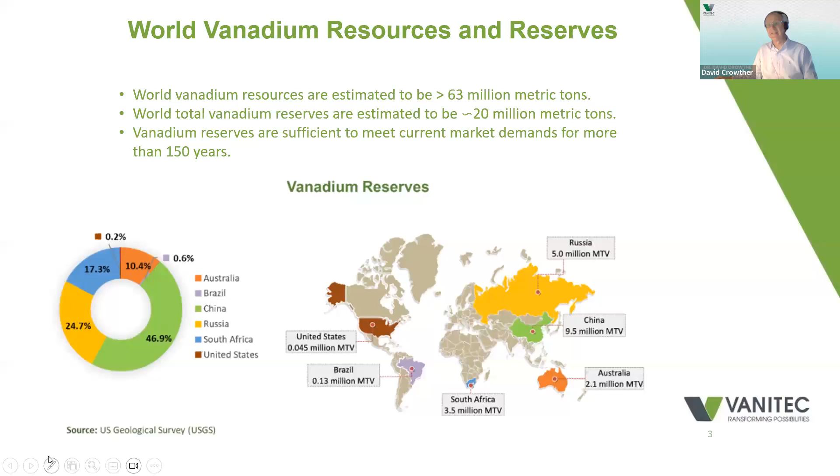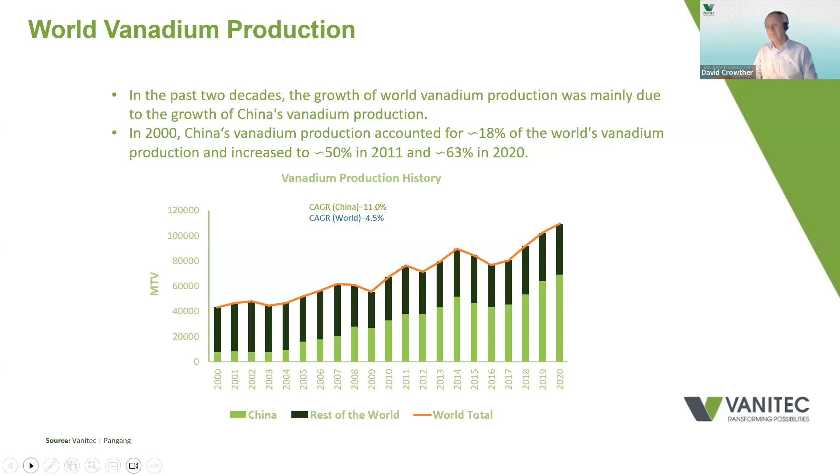Looking at the use of vanadium in steel, the majority is used in HSLA steels, high strength, low alloy steels, and we're talking about vanadium additions of perhaps 0.1% or less or slightly more. Another proportion of vanadium goes into more highly alloyed steels, such as tool steels. And in these steels, we're talking about vanadium additions of perhaps 1 or 2%.

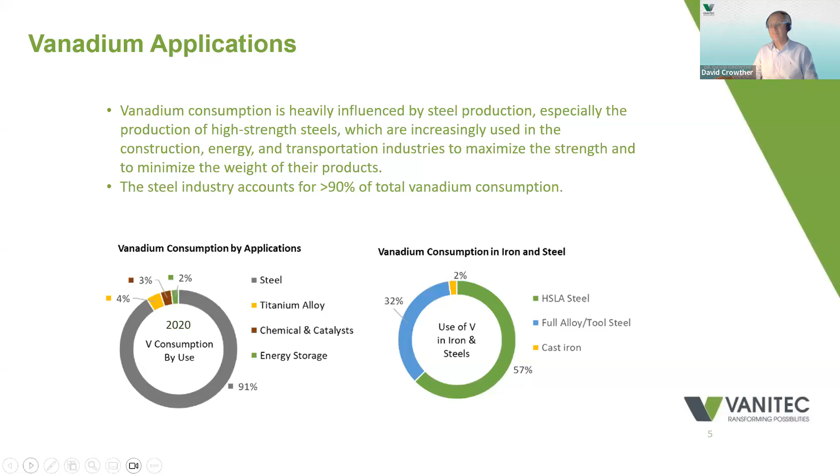Moving on to vanadium steel metallurgy now, and again, it's a huge topic, and we'll pick up on the details later on in the talk. But just as an introduction, I'd like to highlight some of the roles that vanadium plays in steel metallurgy.

Vanadium can be present in solid solution, in which case it increases the hardenability of the steel, but it's often present as precipitates of vanadium carbides, vanadium nitrides, vanadium carbonitrides, and it's these precipitates which have a big influence on properties. They can be present in very large precipitates, for example, in tool steels, where they give wear resistance.

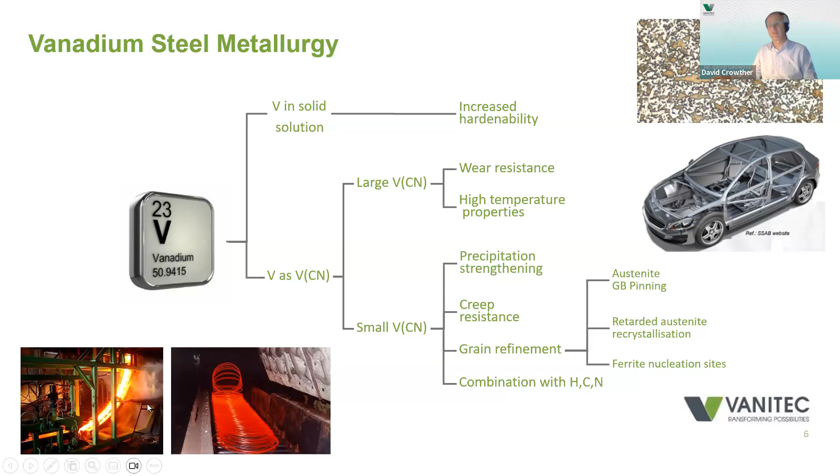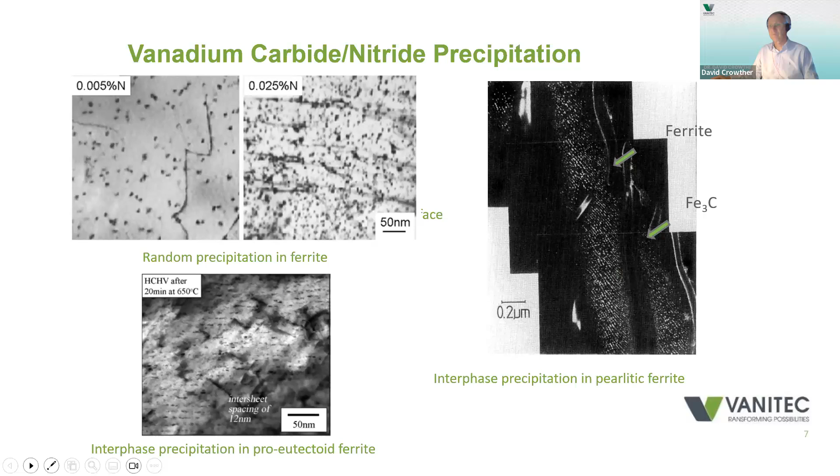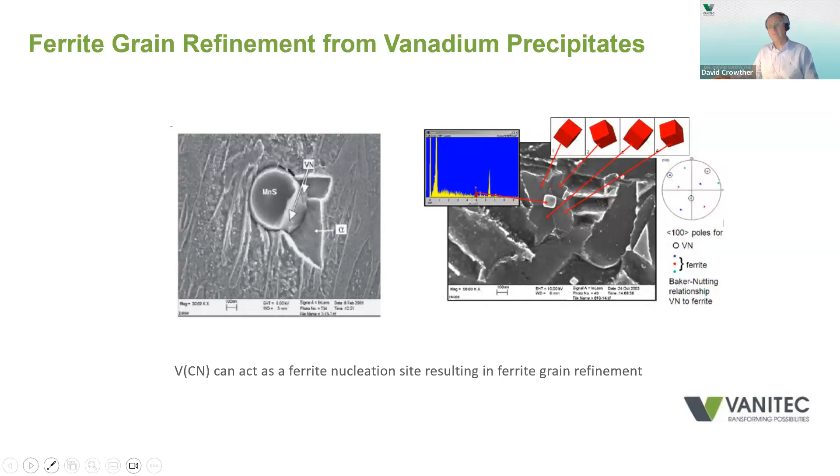Looking at some applications now, steel is used in the construction industry very widely, and that accounts for perhaps 50% of world steel production. And vanadium is used in a lot of these steel products. For example, in high-strength reinforcing bar, vanadium is very commonly used, particularly in China, where most of the rebar is vanadium containing, and also in the US. Vanadium is also used in high-strength sections, and also in high-strength rods, which are drawn into wire to form suspension cables on bridges.

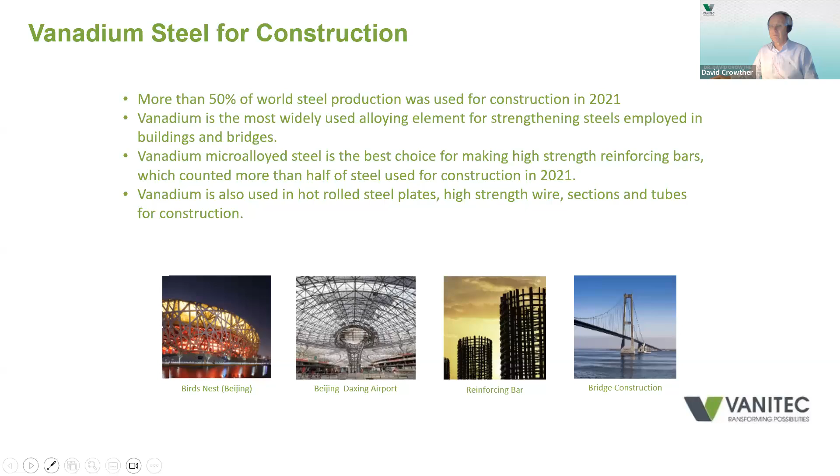Looking at the transportation sector, again, a major steel using sector, vanadium microalloyed steel plates are often used in the shipbuilding industry. Vanadium is also used quite commonly in rails, and I think this has some relevance to the Indian situation, where, as I'm sure you know, there's a big expansion of the high-speed rail network, and vanadium containing rails are being used in this expansion because vanadium rails have increased wear resistance.

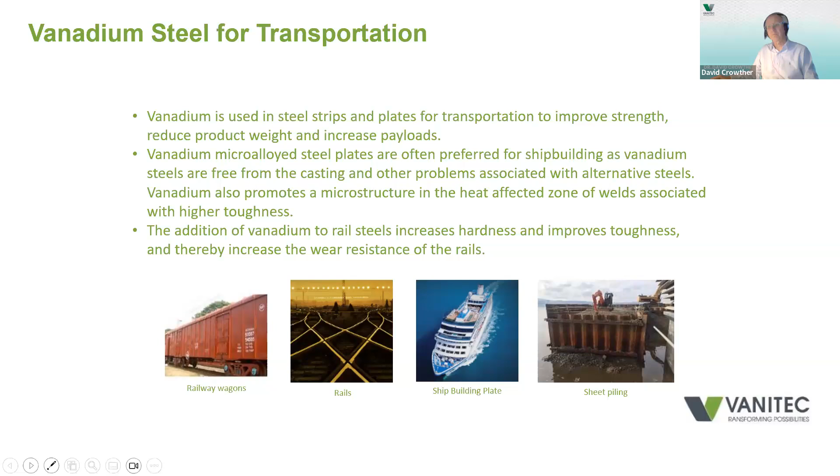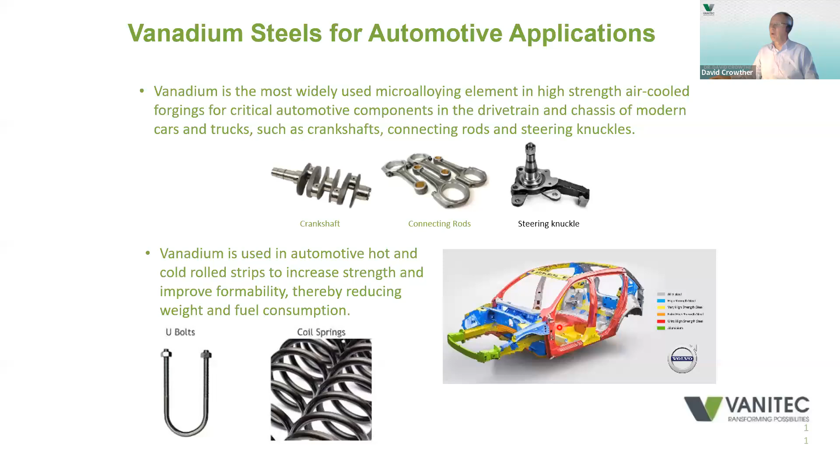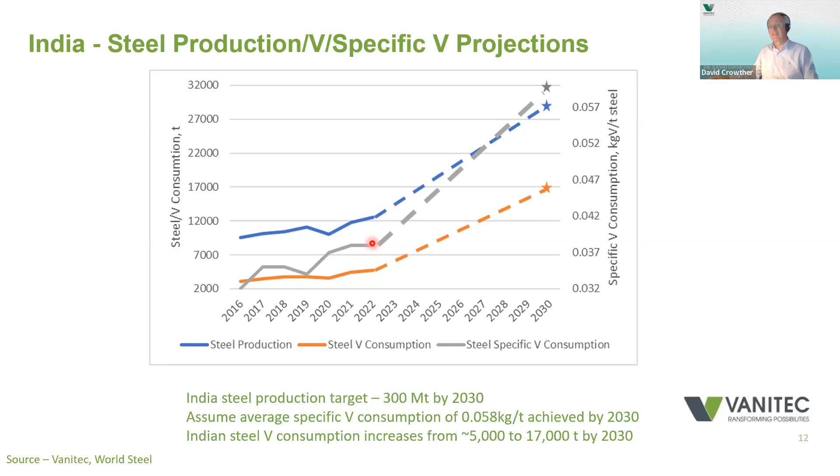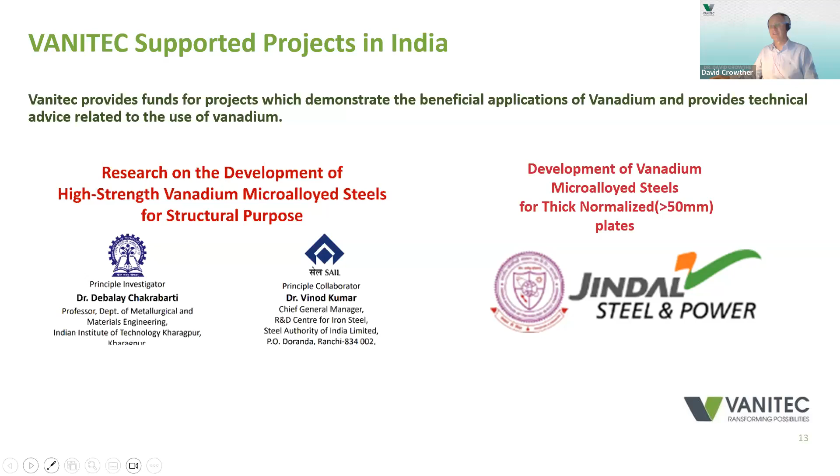So if anyone has any suggestions for new research projects on vanadium-containing steels, please get in touch, and we'd be very interested in taking a look at any new ideas. We're also keen to promote the use of vanadium microalloyed steels, which is the purpose of this seminar. And we've also held other seminars, particularly one last year, again with the help of some of our research associates. We held a great seminar on microalloyed steels, which again aims to promote the use of these steels.

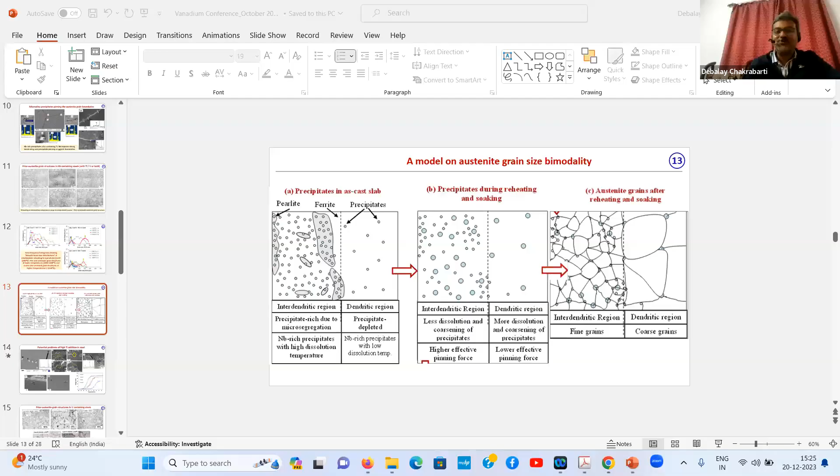Thank you, Manish, for the introduction. Let me share my screen quickly because I want to show you some slides. What we are doing is a project funded by Vanitec Limited. Dr. Dave and his team from Vanitec funded this work, and we are doing it in collaboration with the Steel Authority of India Limited. The project is running at Kharagpur, and SAIL is our industrial partner.

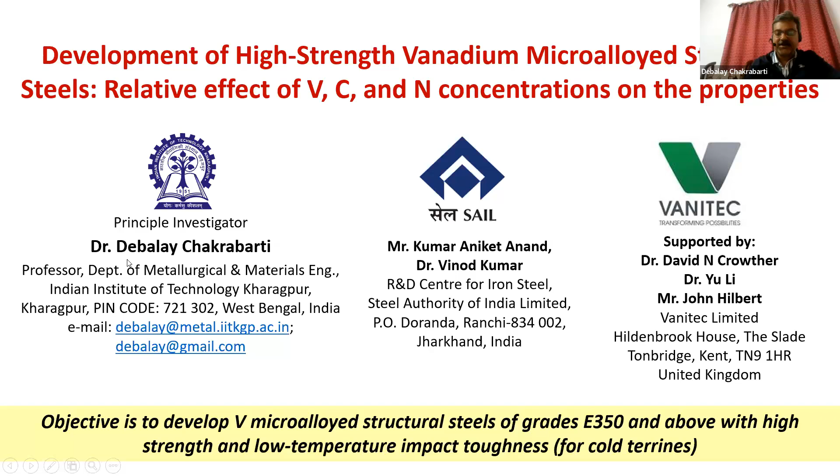Coming to the work, first we tried to address what the competitors of vanadium are. We know that niobium is one of the biggest competitors, and titanium. These are called microalloying elements in steel, because at very small levels niobium, titanium, and vanadium can enhance steel properties: strength, ductility, toughness, and other requirements. These elements first form precipitates, so there is precipitation strengthening.

The next thing is grain refinement. If the grain size can be restricted to a very fine size, not only does the strength go up, but the toughness of the steel also improves. Toughness resists the steel against failure, particularly catastrophic failure, as we can encounter in thick steel products like sections or bridges during adverse situations like very low temperature, earthquake conditions and things like that.

If we look at niobium as an alloying element, it's certainly very popular as a microalloying element, but there are some disadvantages. One technical disadvantage is that it can cause grain size variation, because what we want is not only a very fine grain size, but a very uniform grain size, where all the grains are fine.

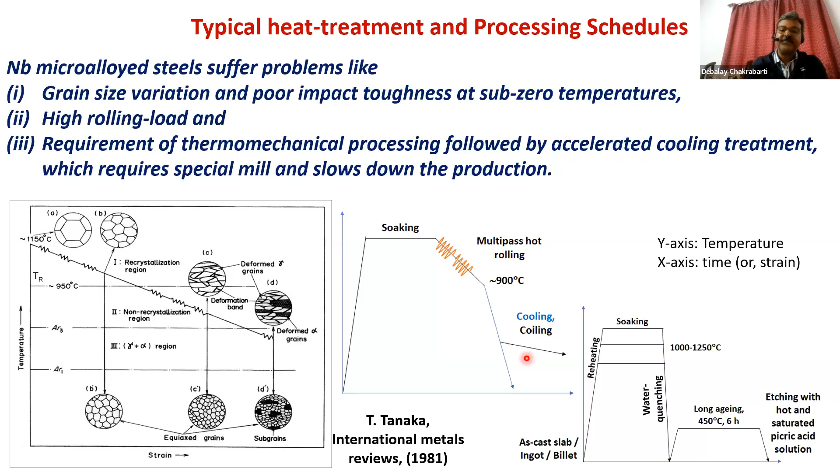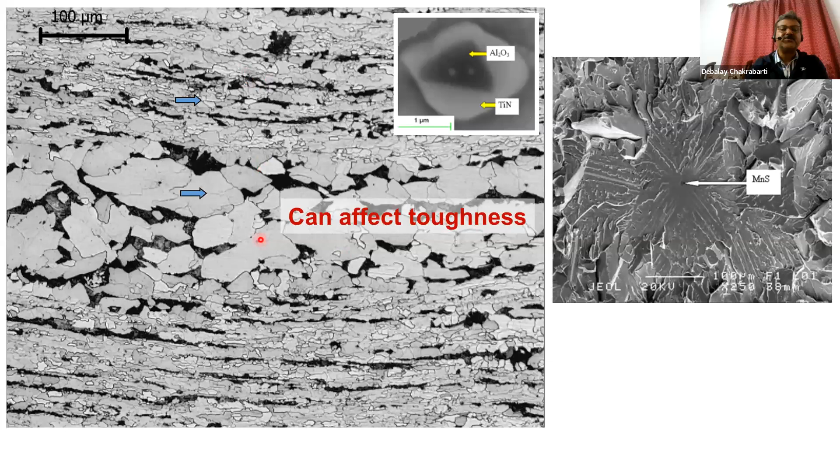So let me just quickly show you a few images. This is what is called grain size variation. You can see very, very coarse grains in between very fine grains. So these coarse grains, when associated with coarse precipitates, can be seriously detrimental to the toughness. So this kind of microstructure often arises in niobium microalloyed steel, which we want to avoid. And as I said, we need a very fine and uniform grain size distribution.

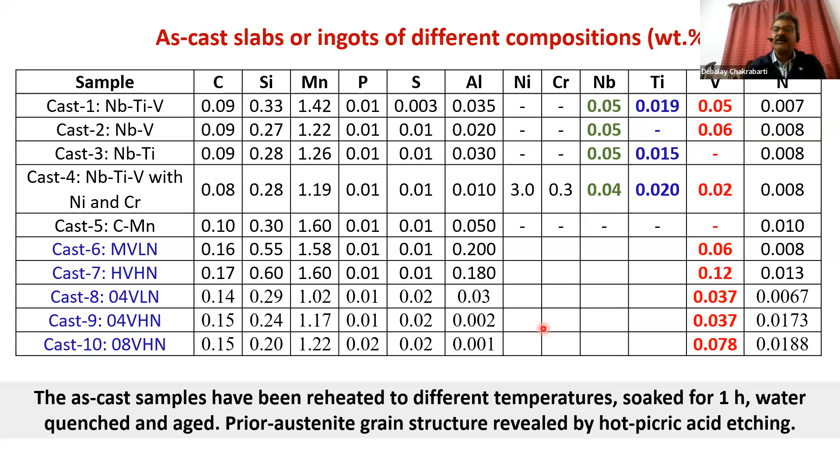So what we have done in our study, let me quickly go through that. We had some steels where we added niobium, titanium, and vanadium, all these elements, against some steels we melted only with vanadium with varying nitrogen and carbon content, just to compare how the niobium steels or titanium steels perform in comparison to vanadium steels. So the as-cast structures were quite similar for all those steels.

But what happens is, as I said, elements like niobium and titanium go through segregation. Segregation means clustering of alloying elements at certain specific locations. Like when we do some cooking, if we add spice, we want the spice to be uniformly distributed in the soup. But if in some place it remains clustered, then that is really a horrible situation. So that is what is called segregation. And niobium and titanium can segregate up to 5 to 8 times the nominal composition.

So if I am adding 0.05 niobium, in a certain region called the interdendritic region, its amount can be 8 times or 7 times more than the average. And that is the biggest problem. Whereas vanadium is much less prone to segregation, and it segregates maximum 1.8 times, which is only in ideal condition. In actual condition, it is even below.

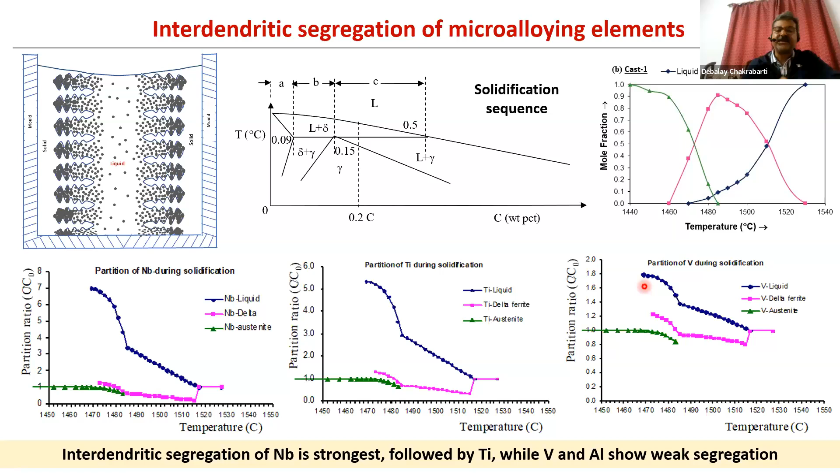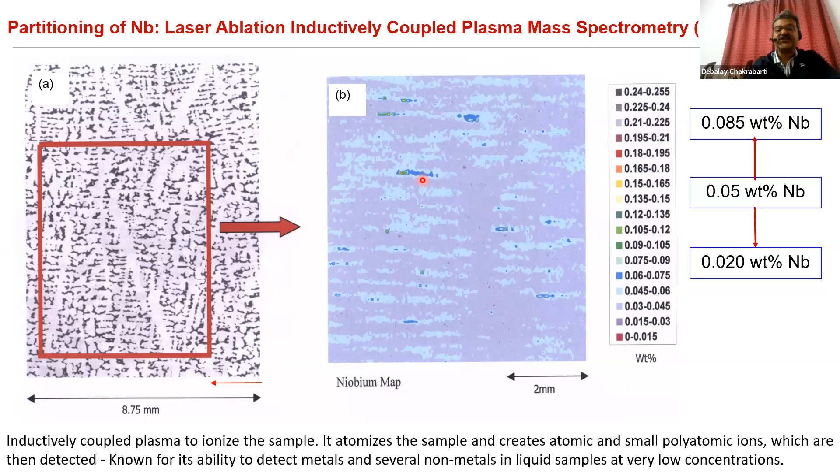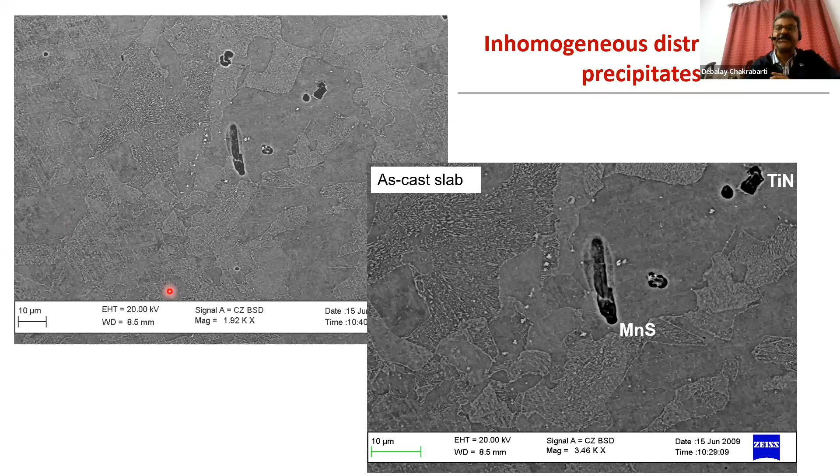So this is what niobium segregation looks like. In the as-cast structure, you see the dendritic structure, and niobium is seriously segregating. In some regions, like the interdendritic region, the concentration of niobium is much higher because it's prone to segregation. As a result, we see non-uniform precipitate distribution. Where niobium is more, the niobium precipitate is more. So you see all these white dots are precipitates, and in the middle of this image, a large number of precipitates, but in the surrounding region, very low precipitate density. So this is the outcome of segregation. It creates a non-uniform precipitate distribution.

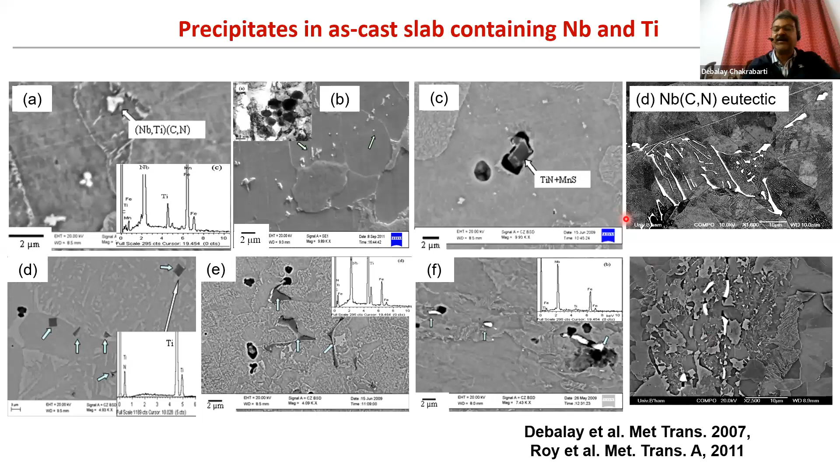And because of segregation, the precipitate size can be many times higher than what is expected considering nominal composition. Because if niobium is segregating in a certain region, naturally the precipitates that form will grow to a large size, and those precipitates can even reach several micrometers and form something called eutectic compounds at some locations. And if these kinds of hard particles are present, they can be really detrimental to properties like toughness, as they help in crack initiation.

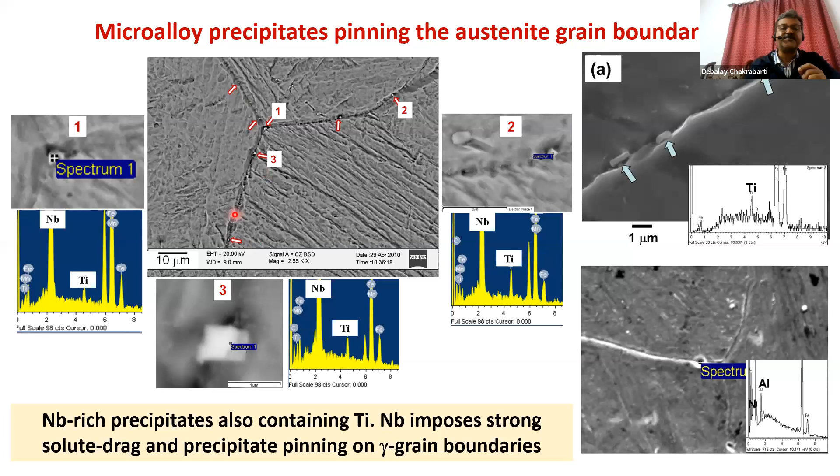And these precipitates control the austenite grain size, because before rolling, we have to reheat the steel to the austenite domain at 1200 or 1150. And at that temperature, these precipitates actually pin the grain boundaries. And here is the evidence: scanning electron micrographs showing the precipitates, white dots, pinning the austenite grain boundaries. As a result, what happens? At low temperature soaking, which we generally do not prefer in our rolling mill or section mill, you may find a more uniform austenite grain structure, but at high temperature, that can be a highly non-uniform grain structure.

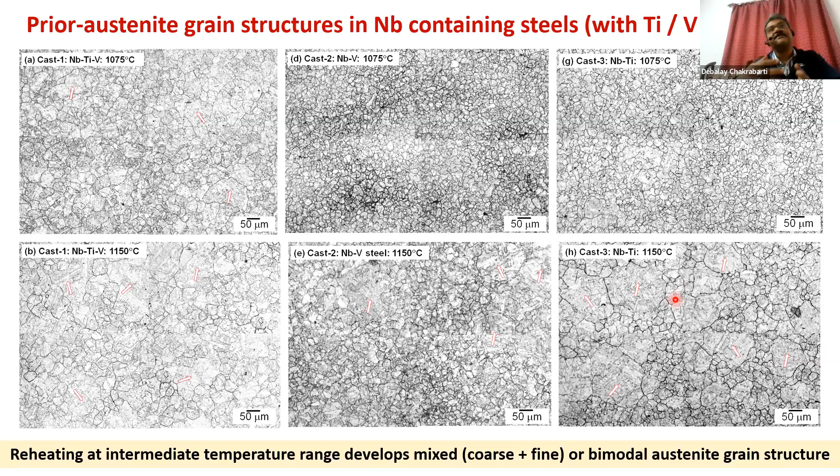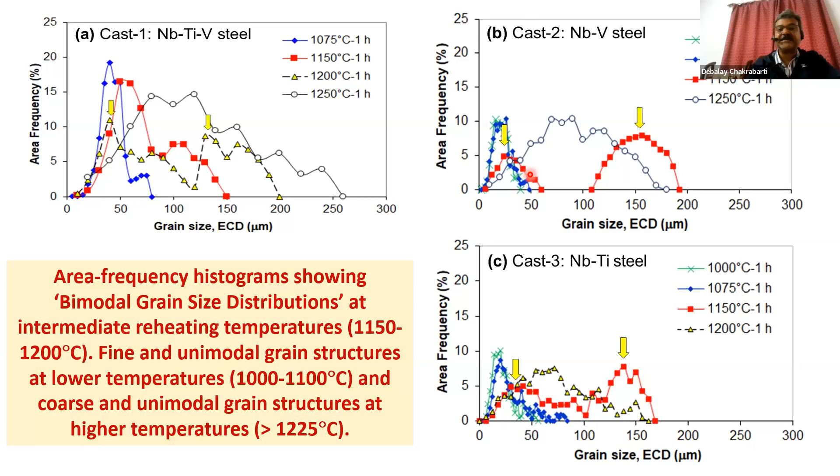And this non-uniform grain structure, after rolling, can result in this kind of grain size variation, which is one of the biggest problems for niobium steel. And it creates grain size bimodality. You can see in certain cases, like this red colored grain size distribution plot, y-axis is frequency, x-axis is grain size. It's showing a bimodality, because it means there are fine grains along with coarse grains. And as I said, this coarse grain can be very detrimental to the properties.

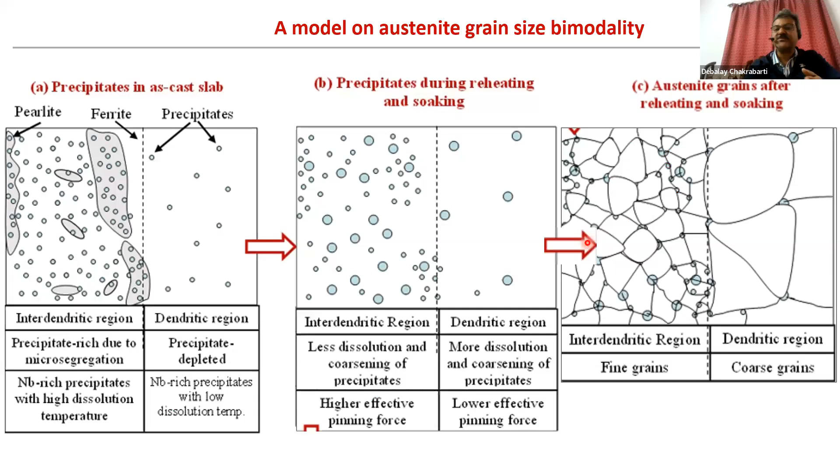What is happening is, in some region, a lot of precipitates pin the grains into smaller size, and in other regions, very less amount of element is present, so their grains can grow freely. So this is a big problem in niobium microalloyed steel. In titanium also this is a huge problem, because titanium forms a very stable titanium nitride precipitate. And if there is segregation, naturally those precipitates can become many in number and large in size.

If we remember, the Titanic sank where the water temperature was -2 degrees centigrade, because the steel had a ductile brittle transition temperature of +30 degrees centigrade. Now the steel requirement is we need the DBTT less than -60 degrees or even lower, so that even in very cold terrains the structure remains very safe. But if this kind of thing happens, then it's a worry for us.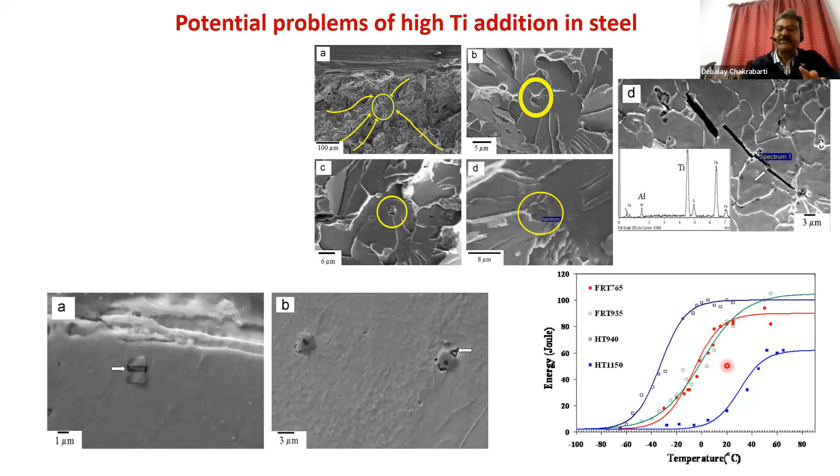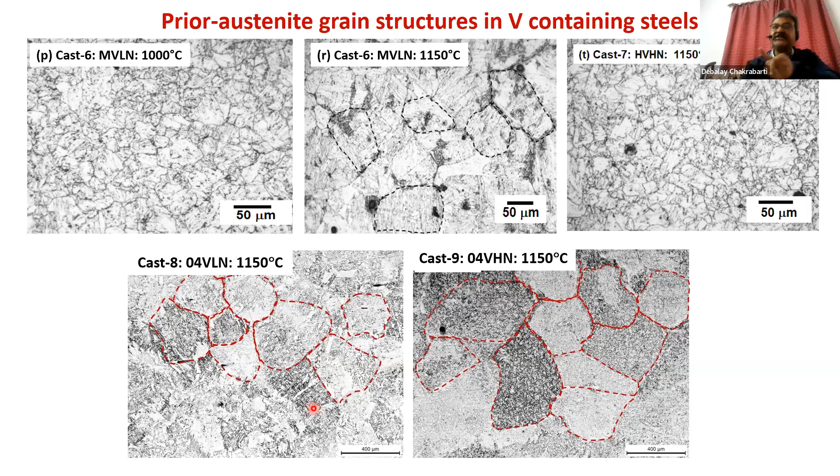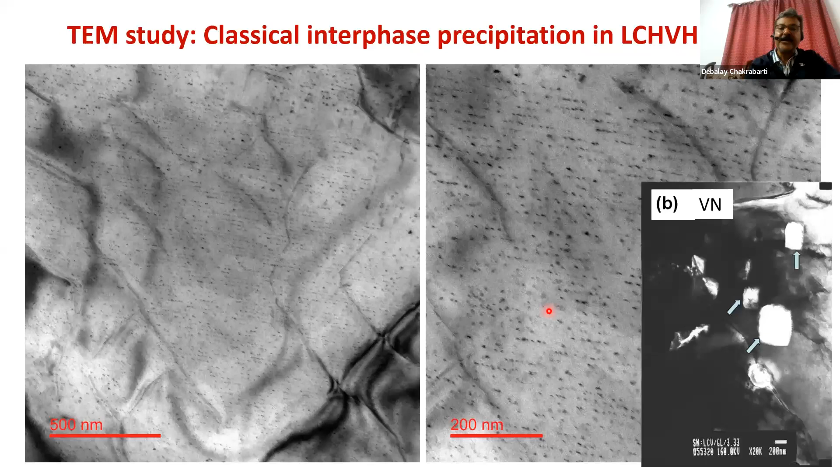Vanadium steel is much better in this respect. You can see it can have coarse grain size, but uniform grain size. This is the austenite grain size at high temperature. Depending on reheating temperature, grain size can vary. But the good thing is, grain size variation does not appear. Here, the grains are uniform in size. And then after rolling, you will find grain size becomes very fine and uniform, and precipitates remain very uniformly distributed. These are the very fine precipitates.

These are the vanadium carbonitride interphase precipitates that we have found in our steels. This is called interphase precipitation, uniform precipitation. In all the grains you will find it's the same because of the lack of segregation of vanadium, which is the advantage. And it gives very good strengthening. Even if there is vanadium nitride formation, its size remains much smaller, at the nanometer level only. So these are not at all as harmful as titanium precipitates.

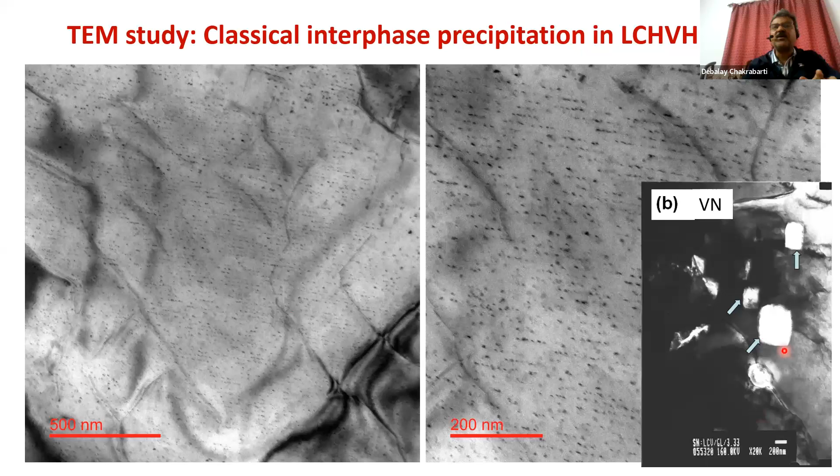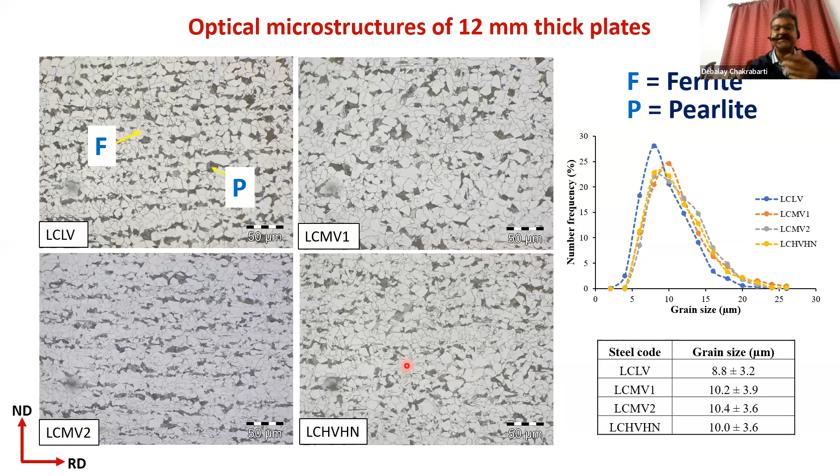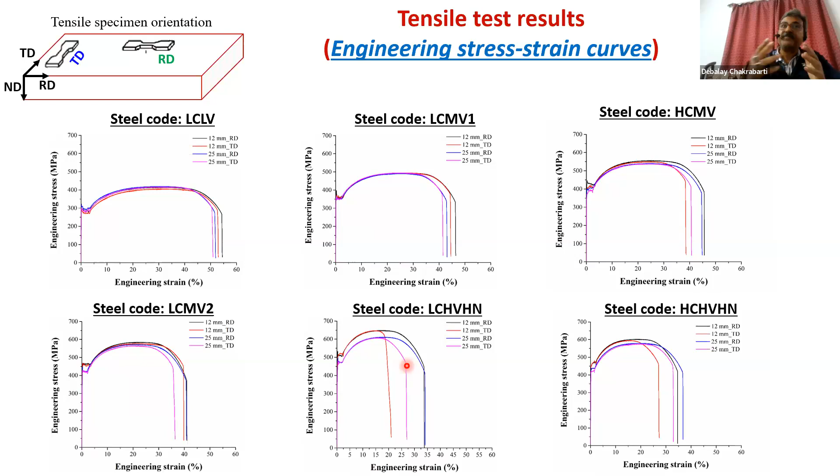So with this, we have done extensive work, prepared several melts and achieved the vanadium microalloyed steel grain structure. If you remember the earlier one I showed, and if you see this, the grain size is much more fine and uniform. And for properties, in the sections and plates that we are rolling, we are achieving the 410 MPa YS requirement, as we call it E410, or even higher E450 grades. You see the kind of strength we are achieving, yield strength 410, 450 MPa, with the necessary impact toughness.

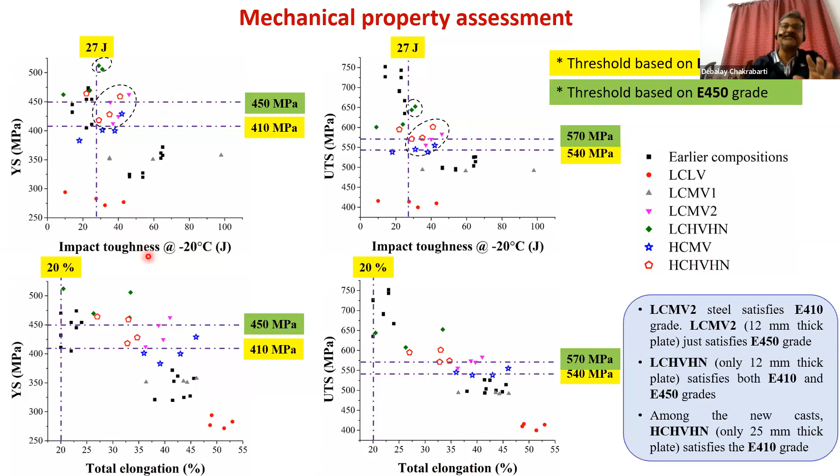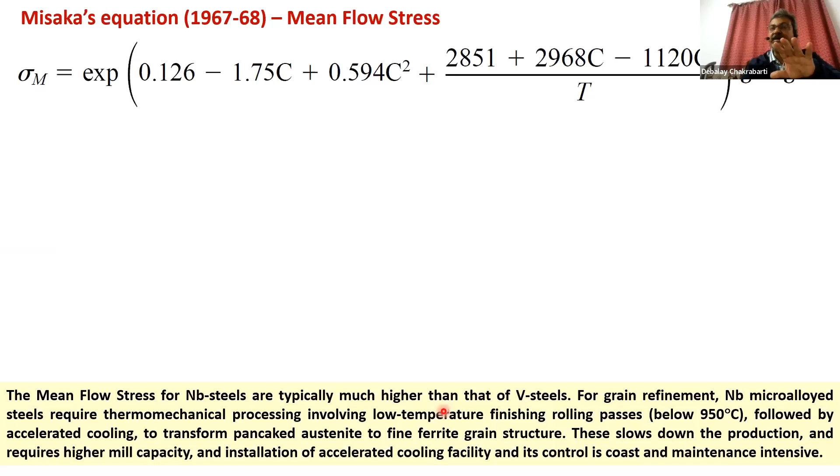So overall, this is what I want to show. And as I said, one of the biggest advantages of vanadium steel is that rolling load remains low. So the steel becomes rollable. Cracking problems do not appear since we do not need low temperature deformation. And here I have some complex equations to justify why the rolling load remains low. And as I said, it does not require controlled rolling facilities or accelerated cooling facilities. So it's a win-win situation from this perspective.

Of course, niobium has its own advantage in grain refinement, but this grain size variation is not a desirable phenomenon, where vanadium is much better in this respect. So overall, this is my answer.

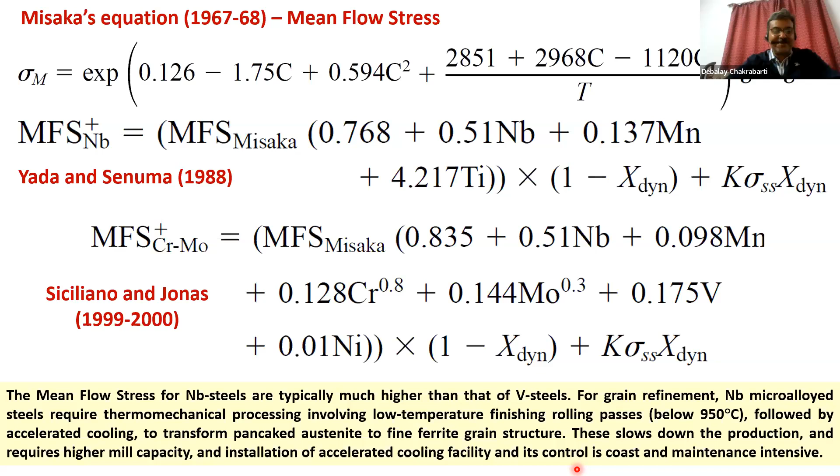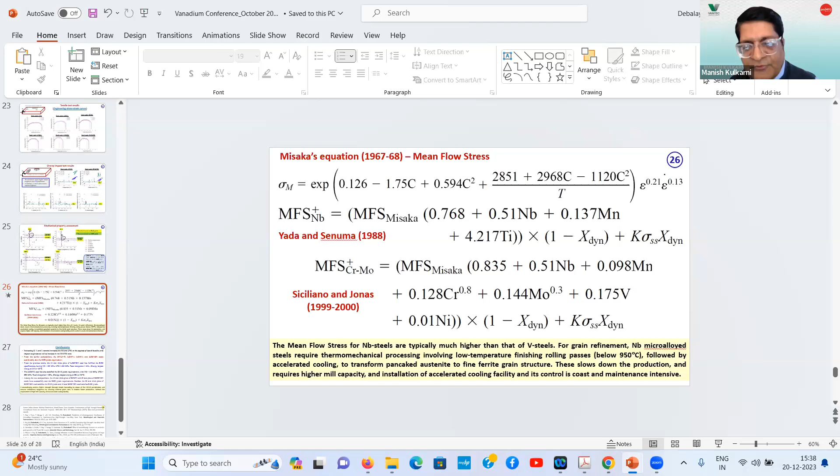Yes, Dr. Chakrabarti, it was very comprehensive, and you explained very well the grain structure and the comparison between niobium, vanadium, and titanium. And you also mentioned the rollability and the advantage of using vanadium steel. So it is very interesting. Of course, we have representatives from the other side of the industry, and we will also pick their brains about these aspects.

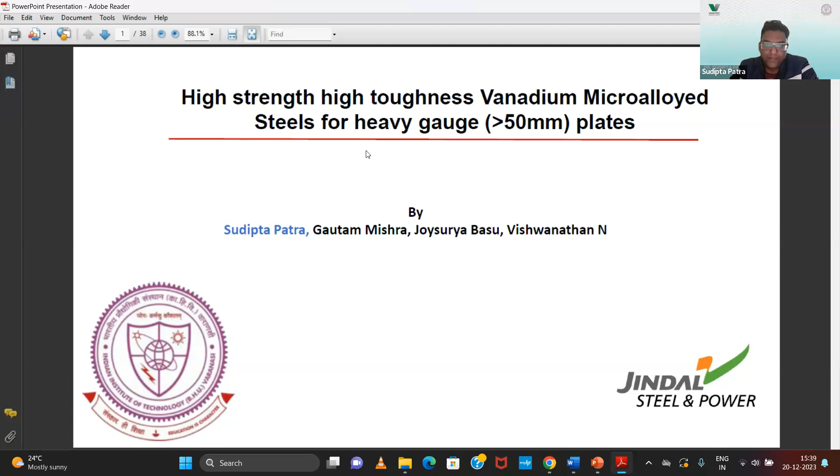So we are doing this project for the last 1.5 years. We are trying to develop high strength, high toughness vanadium microalloyed steel for heavy gauge plate, especially greater than 50 thickness plate, with Jindal Steel and Power, our industrial partner. Basically, the problem with these grades is in high thickness. It is very difficult to achieve the mechanical properties at greater than 50 thickness.

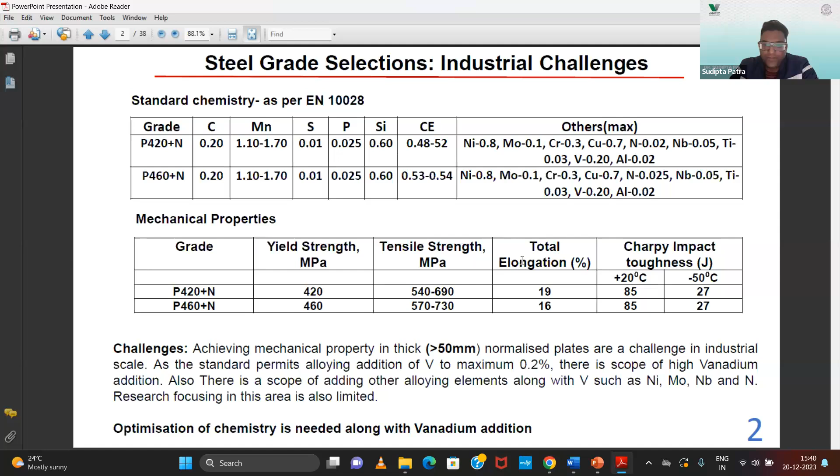Normally these steels are preferred in normalized condition, because in normalized condition toughness is also very high, and the requirement of strength and toughness is given here. You can see minus 50 degree 27 joule impact toughness is required, and 460 MPa YS is required. This is the chemistry standard as per EN 10028. You see there is scope for vanadium addition of 0.2%, and there are other alloying elements also. But we will try to develop this steel with vanadium and nitrogen.

So the literature review and scope is that there is a lot of literature on vanadium alloyed steel and its precipitation strengthening, but what is unique is the normalized condition, when we austenitize at 900 degrees centigrade. There, some precipitates will dissolve and some will remain undissolved. We want the dissolved precipitate, so the vanadium will be in solid solution, and then when we cool it, we will get fresh, very fine precipitates, so that we get very high precipitation strengthening.

But at the same time, if we have undissolved precipitate, that will pin down the austenite grain boundary and not allow the austenite to grow, so we will get very fine grain. So there is a competitive effect of grain refinement from the fine austenite, which comes from the undissolved vanadium nitride precipitate, and precipitate refinement from the dissolved and fresh reprecipitation. That is one aspect we thought is very interesting. Another aspect is vanadium and nitrogen optimization.

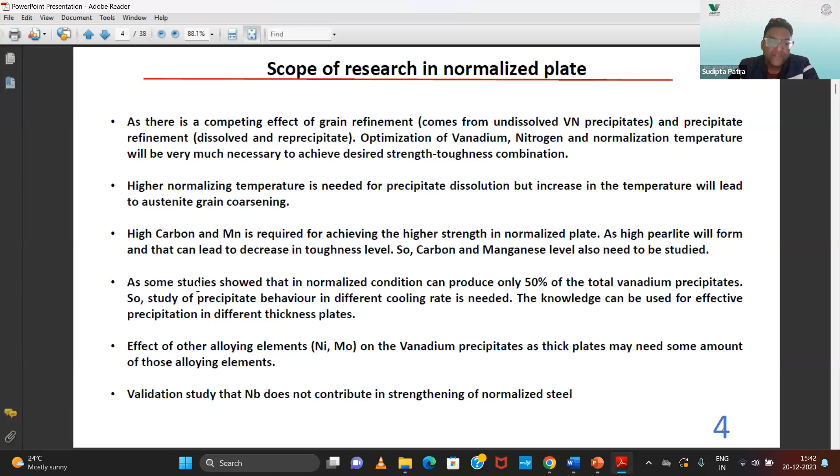Another thing is that in a hot rolled plate there are other strengthening mechanisms, such as dislocation strengthening, together with grain refinement and precipitation strengthening. But in the normalized plate, we mainly have grain refinement, grain boundary strengthening, and precipitation strengthening, with little dislocation strengthening. We are also exploring the effect of higher carbon and manganese, up to say 0.2%, which is allowed in the standard. These are the aspects we are studying.

We have melted almost 4 varieties of steel from the initially decided chemistries. What we observed is that if we add nitrogen, the precipitate dissolution temperature also increases, so many precipitates remain undissolved at the soaking temperature of 900 degrees centigrade, and we get very good grain refinement. We also observed that if we add aluminium for deoxidation, say 0.03 to 0.04, it competes with vanadium for the nitrogen and precipitates as aluminium nitride, so we can lose strength. So we have to keep aluminium low in the composition.

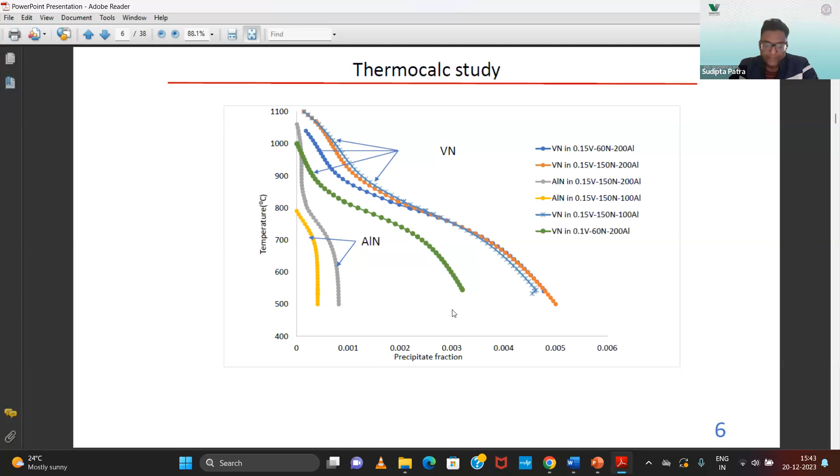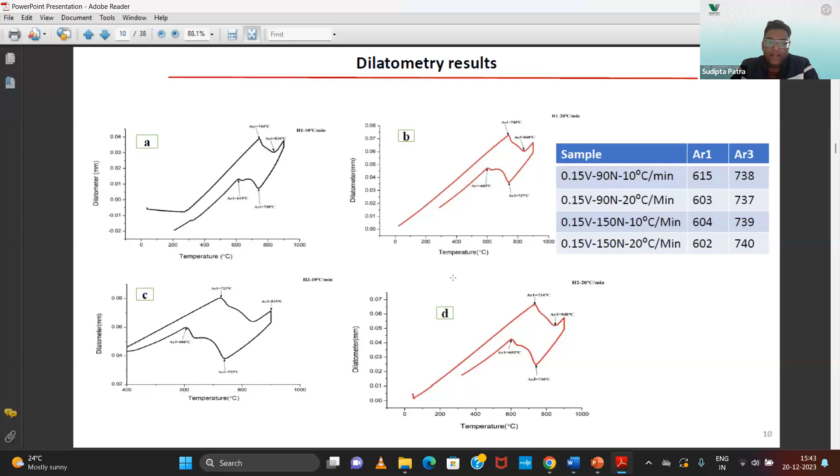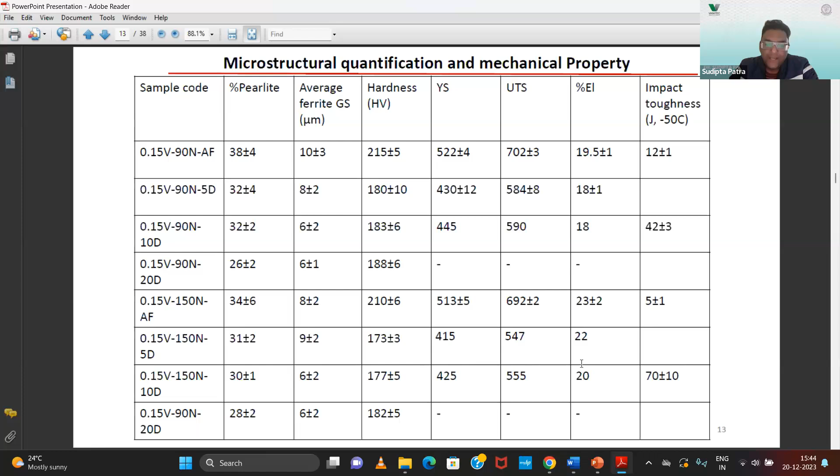Then we measured the temperature profile, took these 4 chemistries, melted them in a vacuum induction furnace, rolled them, and got this ferrite pearlite microstructure. With the chemistry of 0.15 vanadium and 90 ppm nitrogen, we could achieve 520 YS and 702 UTS in the as-forged condition. When we annealed it, strength was a little lower, but we got very good impact toughness. With high vanadium and high nitrogen, we got even 70 joule impact toughness at minus 50 degrees centigrade.

Here we are not adding any alloying element, only vanadium and nitrogen and a little carbon manganese. The EBSD analysis also shows a high percentage of high angle grain boundaries, showing the recrystallized structure. Then we varied the austenitization temperature also, and observed that as we increase the temperature, due to precipitation strengthening, our YS also improves.

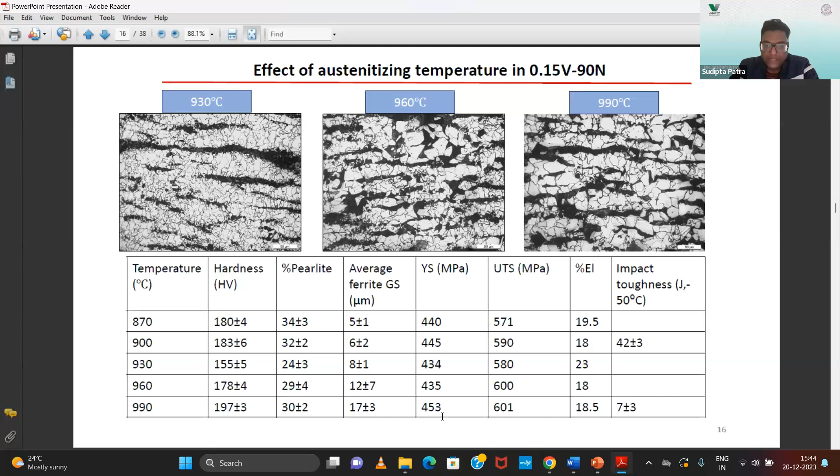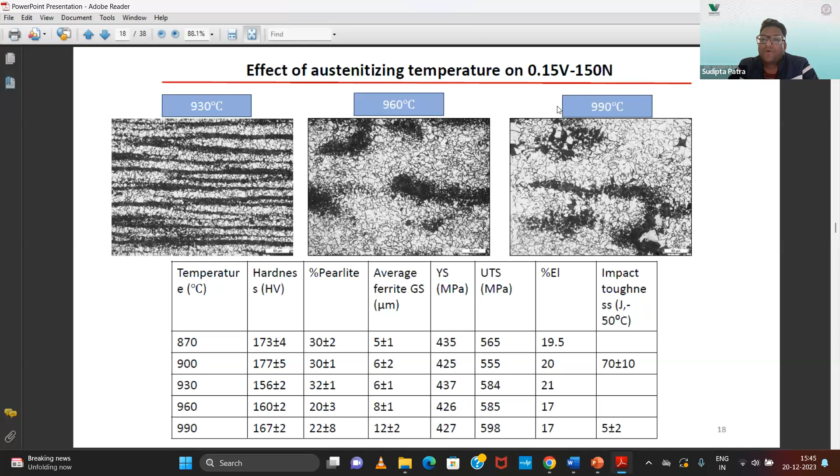First it is decreasing and then it is increasing due to the high precipitation strengthening when the precipitates are dissolved and then reprecipitated. So again we have taken this 150 nitrogen steel at higher temperature. We can see that the vanadium precipitates did not dissolve here, as the precipitation stability is high in case of 150 nitrogen. So in this case we have observed that the high nitrogen content can lead to very good grain refining, and the grain will not grow because of the precipitation stability in case of high nitrogen and high vanadium steel.

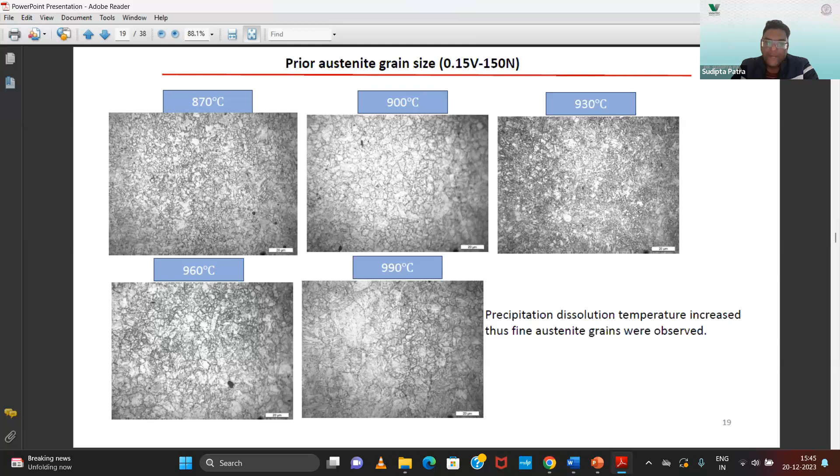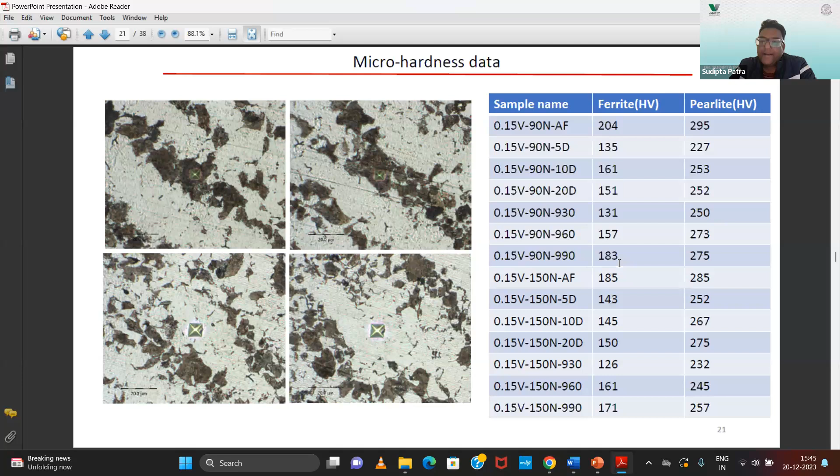So the precipitation strengthening effect will show good hardness also here with the normalizing temperature. And we can see the micro hardness in the ferrite region. In the as forged condition we could see 200 Vickers hardness in the ferrite itself, and at 990 degrees centigrade we could again get 183 hardness.

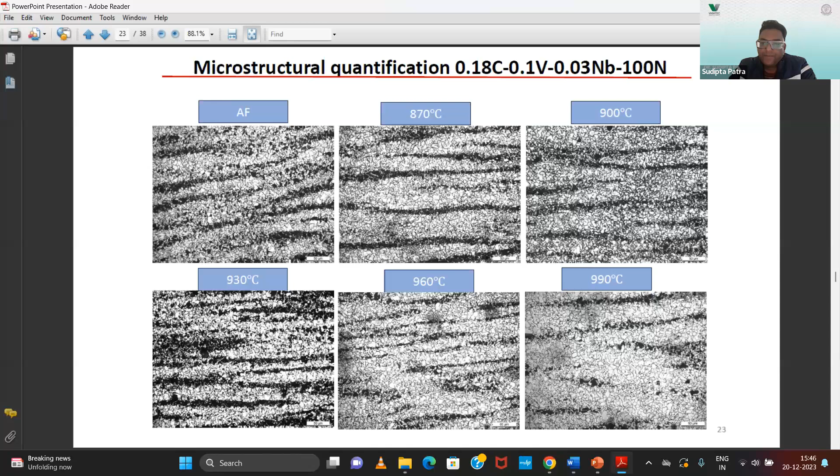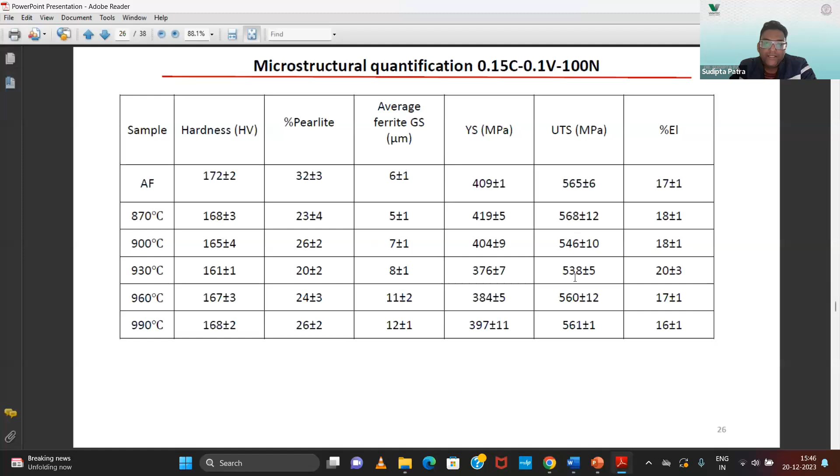So here we have also tried the combination of niobium and vanadium. Here also we could observe very good grain refinement as well as the precipitation strengthening effect. And here also we could get around 460 to 470 MPa yield strength with good elongation and UTS.

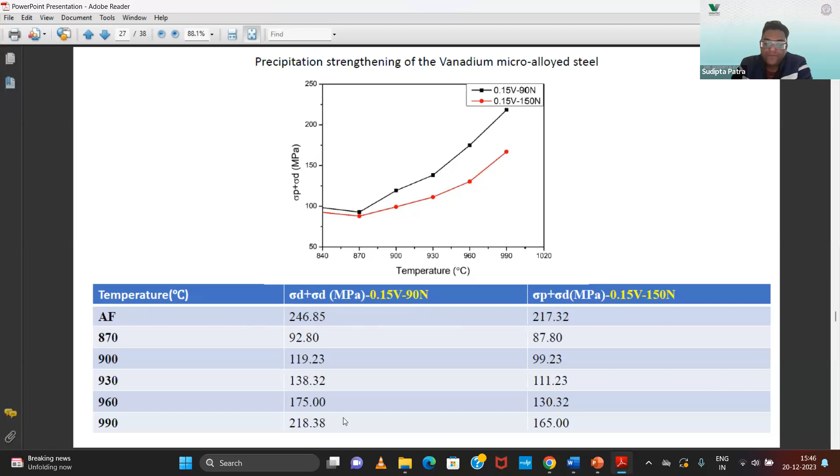So with these two alloys we could calculate the precipitation strengthening, and we can see that 246 MPa precipitation strengthening itself can reach this value with high nitrogen and a little bit lower nitrogen, 90 nitrogen and 150 nitrogen. In the as forged condition we could get these values, and also at higher normalizing temperature we could get very high precipitation strengthening values. So you can observe the high strength and high precipitation strengthening.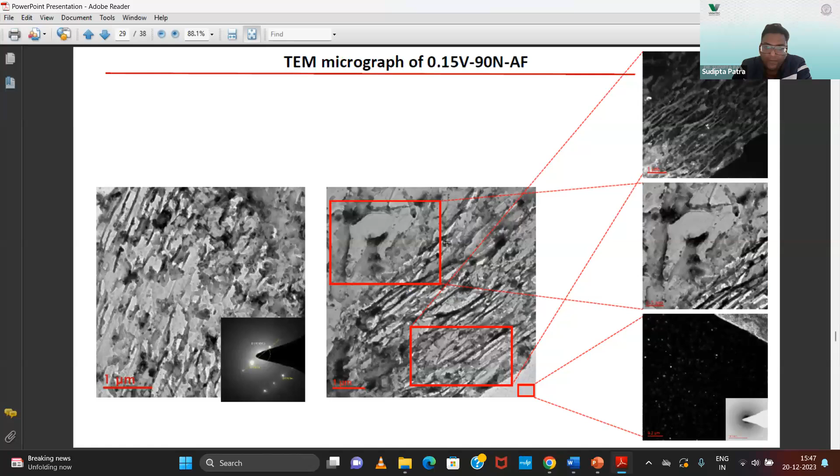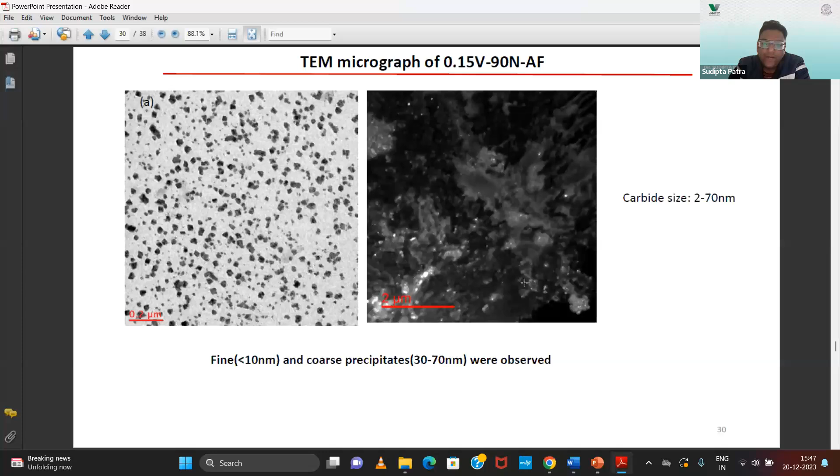So the TEM observation of the precipitates is presented here. We could see very fine precipitates; 2 to 70 nanometer is the precipitation range. In this condition, some of the vanadium nitride precipitates are coarser in size, but very fine 2 nanometer precipitates also can be observed in the bright field and dark field images. And some clustering of precipitates is also there, but there are very fine and uniform precipitates.

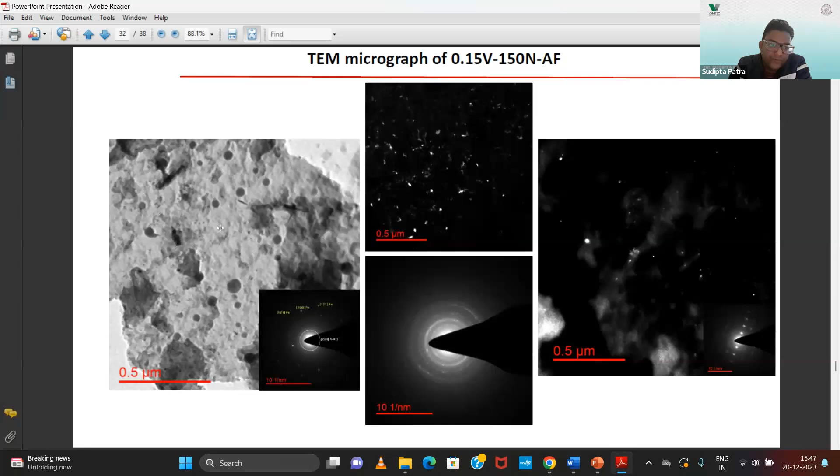Mainly the maximum size is 18 nanometer. So as Professor Debalay Chakrabarti also mentioned, vanadium nitride, though it forms at high temperature, the vanadium precipitates are not very coarse. Vanadium nitride precipitates here in our case are around 18 nanometer at the highest, and very fine precipitates of 1, 2 nanometer, 10 nanometer we could observe here.

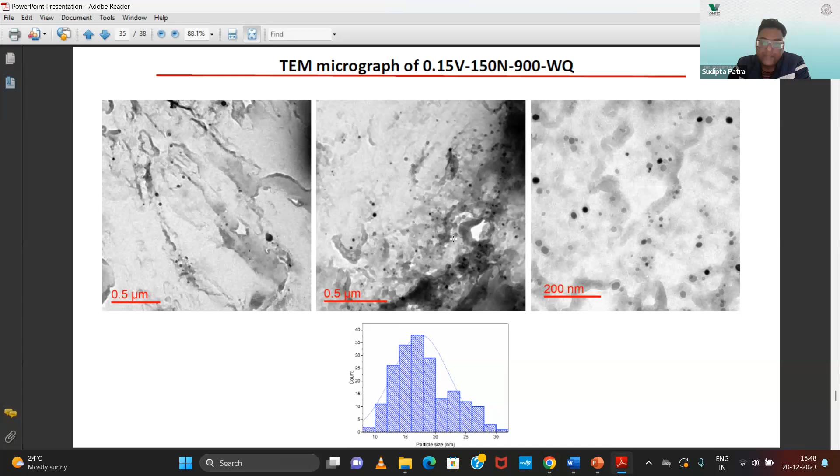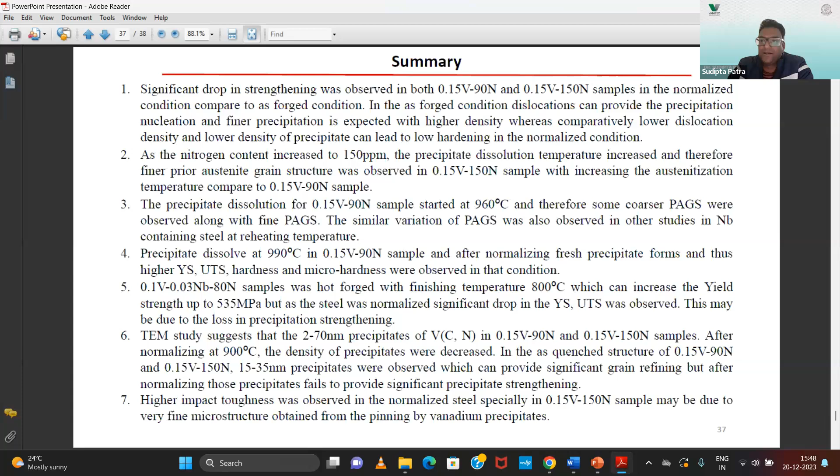Okay, so with this we can conclude that vanadium and nitrogen can effectively increase the precipitation strengthening to a very high level in as forged, as rolled, as well as normalized condition. And this is my answer to the question. Thank you.

Thank you so much, Dr. Patra. Thank you for that very insightful presentation. I will now move to Dr. Sankaran, who has joined us from IIT Madras. And the question to you, Dr. Sankaran. Hello. Oh, yes, please.

Dr. Sankaran, complex alloys often require innovative characterization techniques. Could you elaborate on the experimental methods and analytical tools you have employed to investigate the interaction between vanadium and other alloying elements at various length scales? How do these insights aid you in predicting and optimizing the behavior of vanadium containing materials under different conditions? Over to you, Dr. Sankaran.

Yeah, thank you, Dr. Manish. I have not prepared any slides, but I was told that it's a panel discussion. So, working with vanadium microalloyed steel, for me it is more than 20 years now. I started working with vanadium microalloyed steel for producing multi-phase microstructures during my PhD days. That is the 38MnSiVS5 grade, which these days Kalyani Group is producing.

And there the challenge was, since the microstructure is multi-phase, characterizing these precipitates in each individual phase is a huge challenge. As two of my panel members already showed a lot of microstructures, these vanadium precipitates occur as vanadium carbides as well as nitrides or carbonitrides, depending upon the chemical composition as well as the cooling process. So characterizing them in a particular phase is a huge challenge.